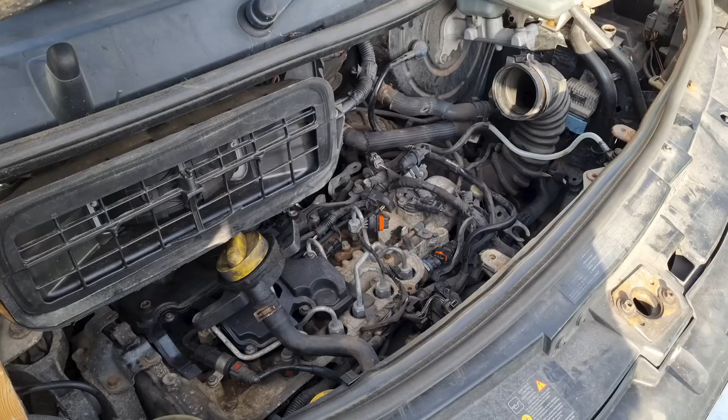Stop striking. Right, it's still Saturday. We've just done the update video and then I've been cocking about with the van, and I hate working on vans, like with a passion, I hate working on vans. It's really annoying and unnecessary, you've got to move everything to get to the thing that you want.

My fabrication table at the minute is just covered in stuff that has to all go back on once the sensor gets here on Monday. Which it better get here on Monday, that's all I'm saying.

Scissors, where's my scissors? So what I'm doing now, I'm not sure what time Sam's coming to get me, it's currently about 10 to 2. But I want to get a start on this Dynojet kit. This is the next job that's happening with ASBO, and there's loads of people that's been interested in this.

What I've got is a set of pod filters that I want to run on the bike. Paul recommended these Pipercross pod filters, he uses them on an awful lot of his bikes and stuff, and they are quite cool. They're going to look really, really good on the bike once it's all done and dusted. Quite a simple looking thing, but they're nicely made, there's no glue oozing out of them all over the place, so I think they're going to be in there.

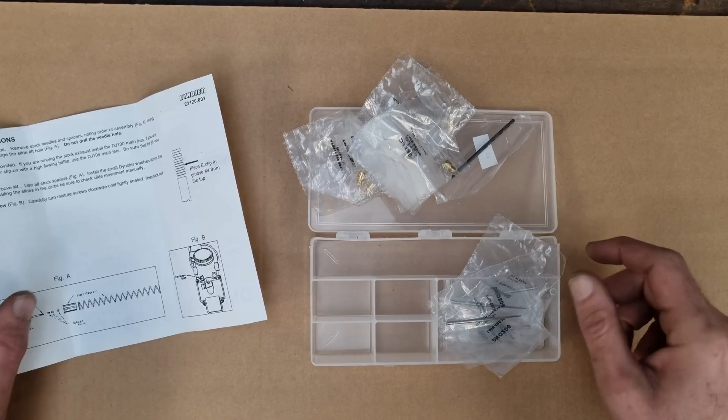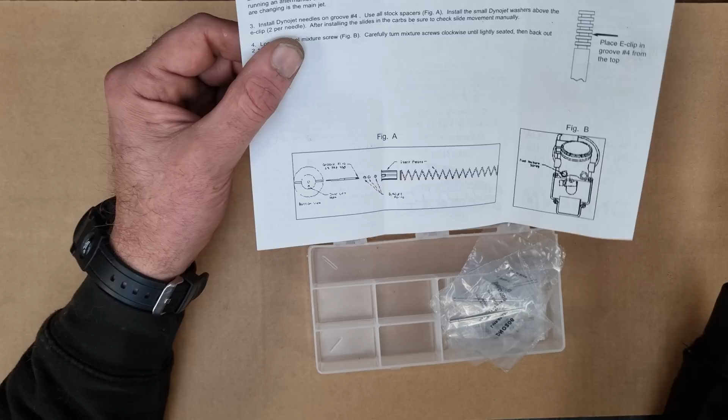I got it wrong, as per usual. They're not pilot jets and main jets, they're basically 2 different sizes of main jets. There's 100s and 104s. The 100s are if you're running a stock exhaust, and the 104s are if you're running an aftermarket exhaust with a higher flowing slip-on, baffled and all the rest of it, which is kind of what I'm thinking we've got.

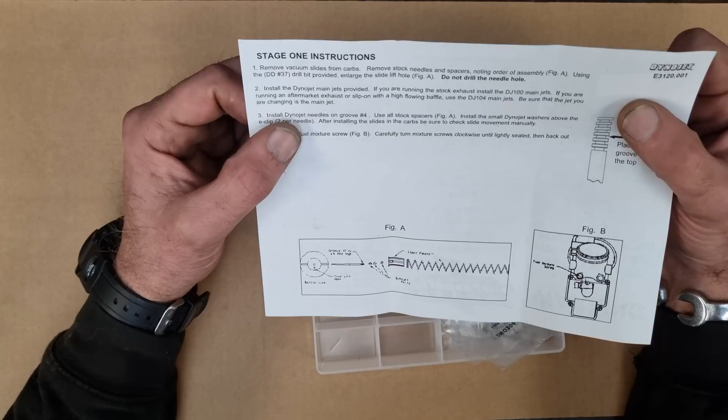To do it, it's actually really simple. There's only 4 steps to it. We'll go through it so you can see me doing it on the carb - that way if I get it wrong, you all get to have a joke. Basically we've got to take the vacuum slides out, remove all the needles and spacers and everything else, and then using this drill, open up the lift hole in each of the slides - the lift hole, not the hole the needle goes through.

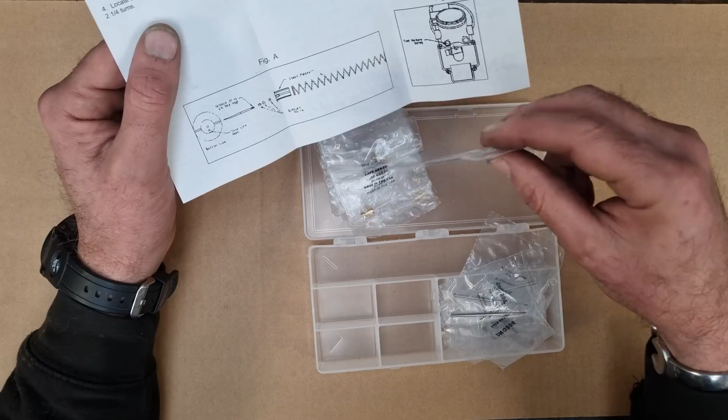Then we're going to stick the main jets in, and we'll go with the 104s because obviously I've got an aftermarket, a very aftermarket exhaust system. Then the needles - they're actually grooved, and you get these little clips, it's not a circlip, it's like, I don't know what you'd call them.

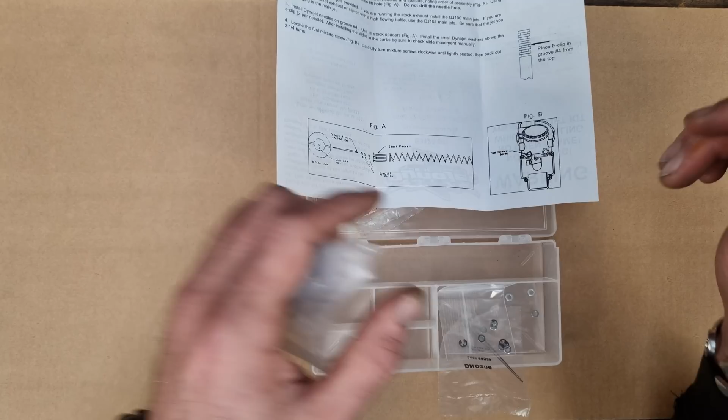What are they? It's not a circlip. What is it? I can't remember the name for them. But anyway, that goes into groove 4. And then we've just got to adjust the mixture screw. We'll get to all that in a second, but let's put those needles all in there.

How many is there? 1, 2, 3, 4. Ideal. Jets we can keep to one side as well, and we can start pulling this lot apart.

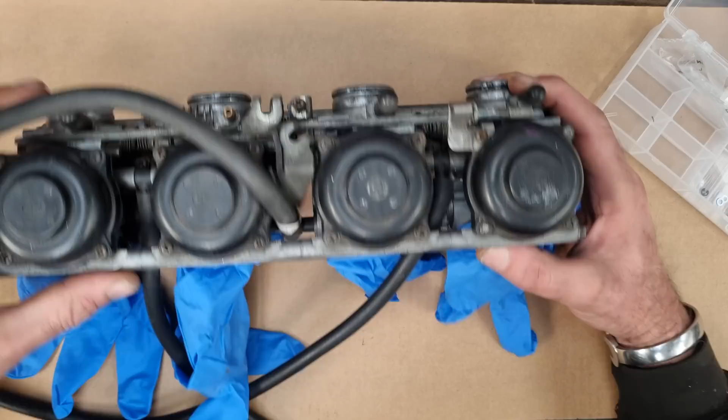So, vacuum slides first. What I'm probably going to do is set this up in the vise, just so it don't go anywhere, and we just do one at a time. First thing I want to do though is give it a bit of a wipe down.

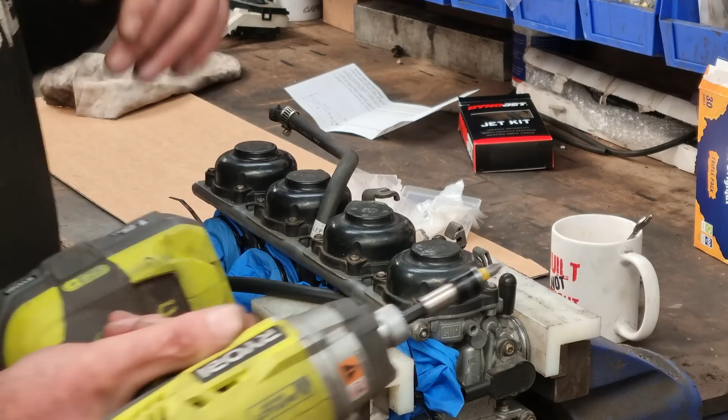I quite like these impact drivers. They are good, they just shock stuff out, but it's quite gentle rather than leaning on it. All these screws are buggered, I need to get them replaced - we'll be putting Allens in.

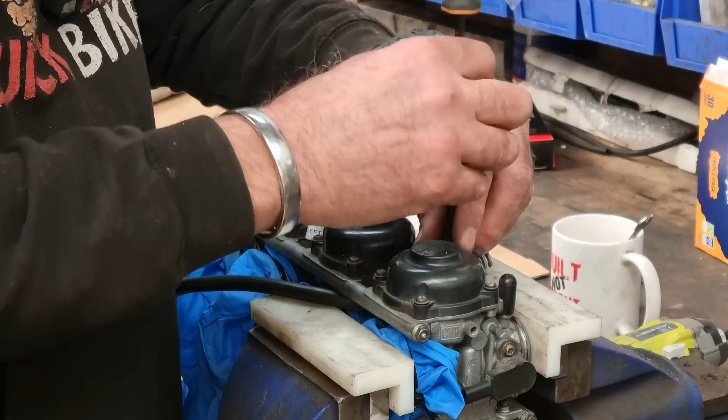This is the tube one. There we go. Right, where's my screwdriver? All I'm going to do is just do them one at a time, rather than go through doing all the slides first and blah de blah de blah.

Alright, so I suppose we could do - it just depends how much time I've got. I don't know what time Sam's coming to get me.

What I might do is do this one, top and bottom, just so you can see it, and then if she comes and gets me, I can just disappear. But I've got enough to finish the whole video. Well, no, actually I won't, because I still want to get them back on the bike with the filters. We'll go through and do all the slides first.

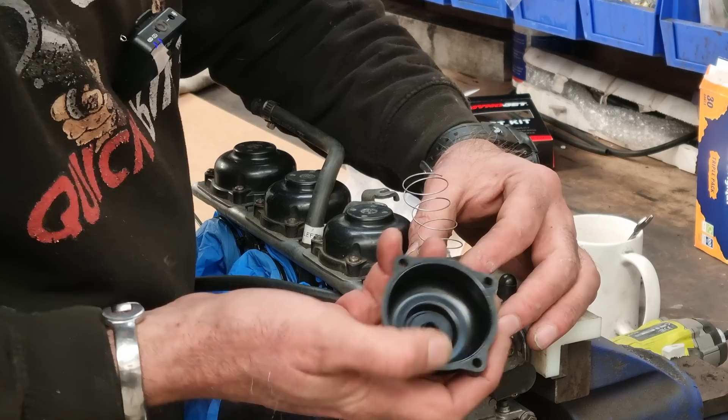Executive decision. Right, so 4 screws, it should lift up. There's a spring under there that locates in that groove, so it goes in like that. Stick that to one side, and this is the slide - it just pulls straight out. There's the needle, and this is just a little retaining clip, so if you squeeze it, it does come out.

Actually, should we do that under it? No, we'll do it over here. I want to have a look at the difference in the needle as well anyway. It's all still nice and clean - then again, it's done bugger all, isn't it? It's just the outside that I want to clean up, but it's going to get vapour blasted.

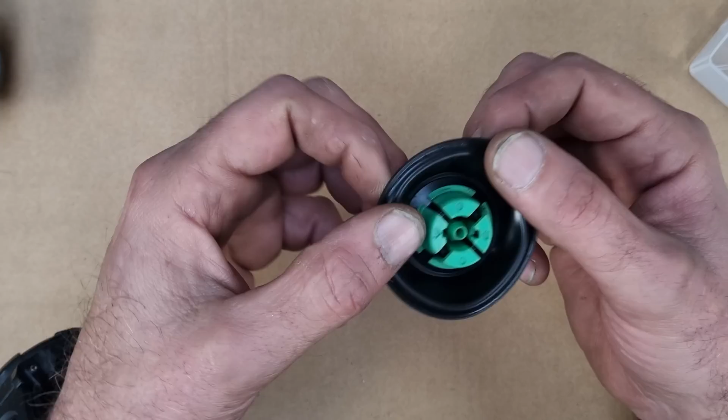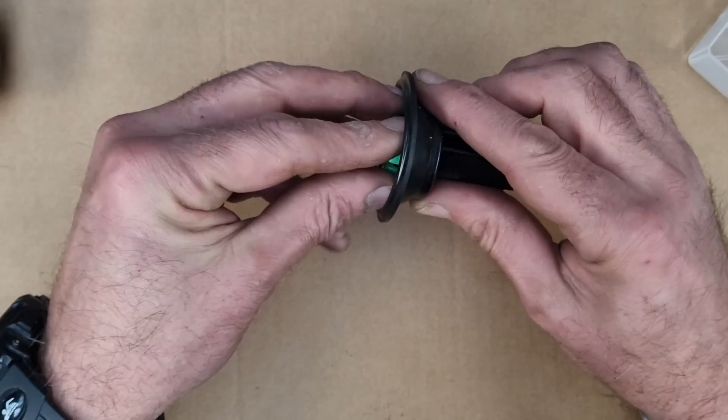Right, well these diaphragms should be fine. The bike was running quite happily before, it's just been sat there with a sealed up engine, so no biggie. So anyway, squeeze that clip, it should pop out like that.

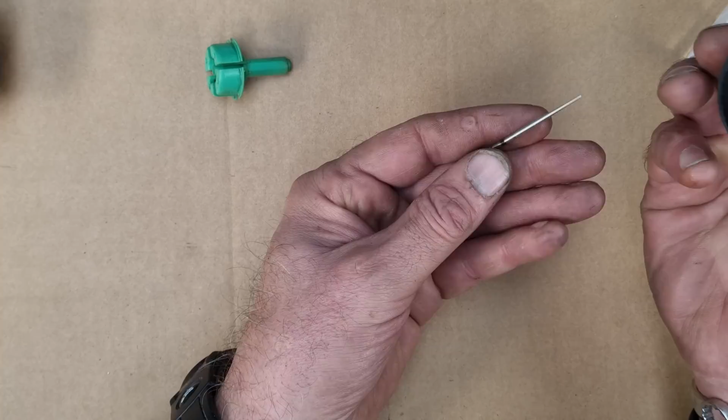And then upend it, the needle comes out. I think I put a washer underneath these - yes I did, and the washer has stayed in there. Right, he needs to come out, but that is basically the needle, and these are the stock ones.

So they're not adjustable like the Dynojet ones are. There's an end to it. If you want to raise it up, then basically you're sticking washers underneath it.

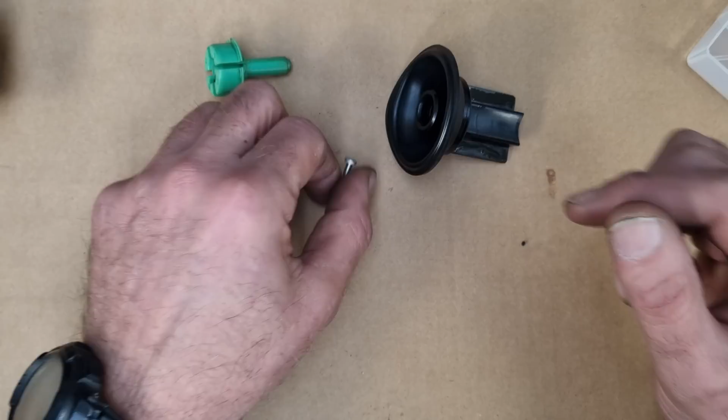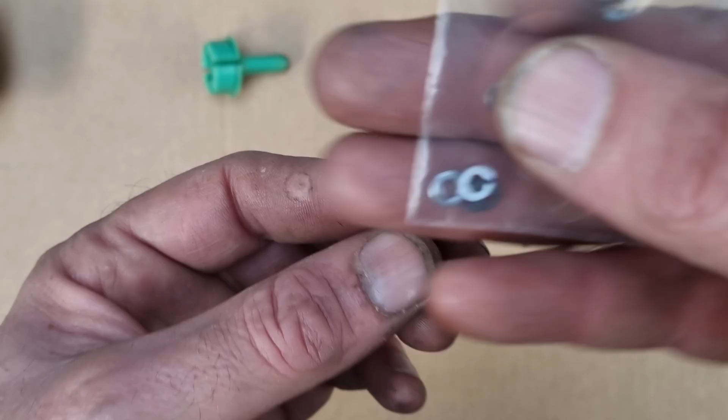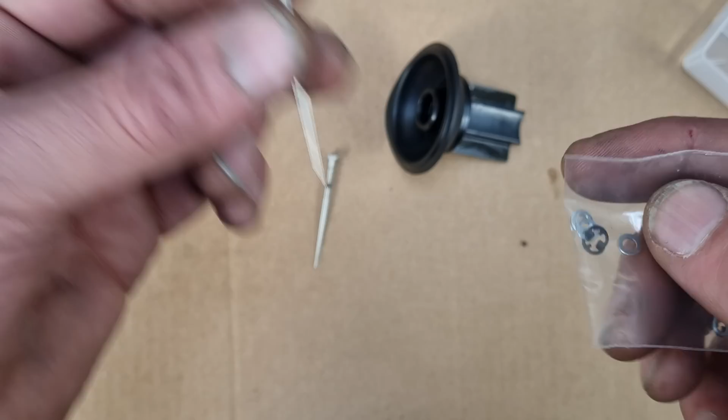If we look at one of the needles here, I don't know if you can see, there's a series of grooves in it at the top, and in the kit you get these little clips, like that one there where my thumb is. So that clip goes into the 4th groove, I think it said, and that basically sets the height of the needle within the carb. So they are slightly different as well in the profile apparently.

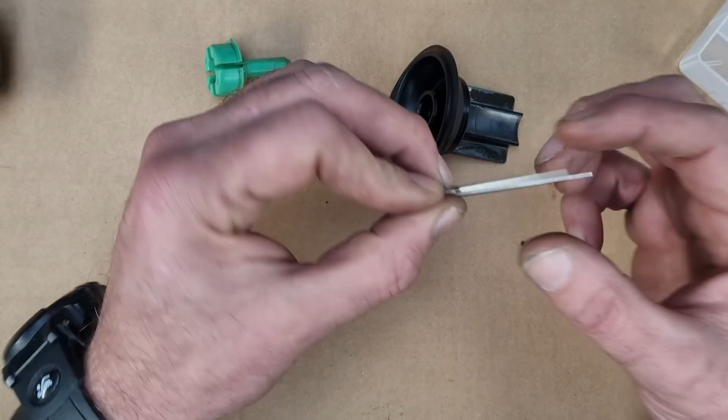So this one is a lot thinner than that one. There's a definite step up there, whereas on this one there isn't so much as a step. It's sort of the taper is longer, whereas this one, it's quite skinny, the stock one, and then it steps out a lot more as it gets up halfway, I suppose.

Right, so we've got all the slides out, all the needles are out, so that's all good. I just cleaned off this micrometer. We'll zero it.

So I have no idea what size this drill bit is. There's nothing on it. On the packet it just says DD37, which could be a number drill, I suppose. But I'm just curious - I have got a set of numbered drills, and I've got the little guide and stuff that tells me what size it all is.

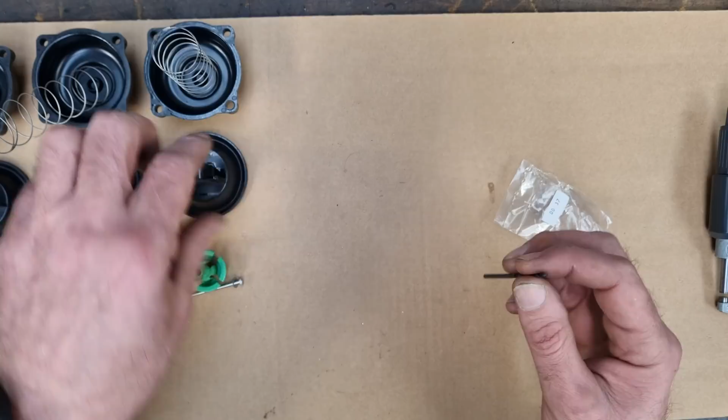2.64, oh okay, all right. I'm hoping it's a little bit bigger than the lift hole, which it is, and you're taking bugger all off of it, you really are. So anyway,

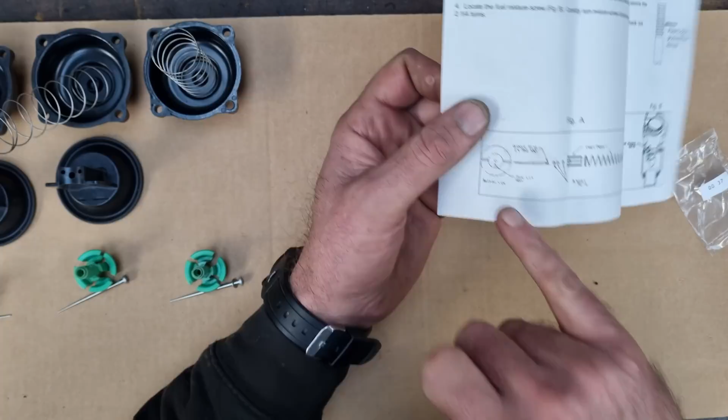2.64, we'll stick him back in his box, and then we're going to drill the slides up. So this is, it shows on this diagram there's only one lift hole. This is just the generic set of instructions, I'm guessing, for any carb. But here we've actually got 2.

So the one in the centre is where obviously the needle comes through, then you've got a hole either side of it. They're the lift holes, and that's what I'm drilling using the drill bit that they provide. So, that's the next bit.

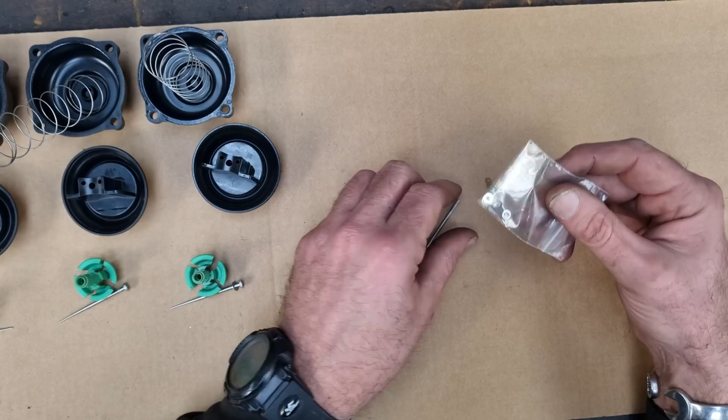So those little clips, he's putting the E-clip, that's what these are called. So the E-clip is going in slot number 4.

And these are tiny, so I just know it's going to ping off into the corner of the flaming workshop. I'm never going to see it again. Come on. 1, 2, 3, 4.

Right, a little pair of pliers, I think.

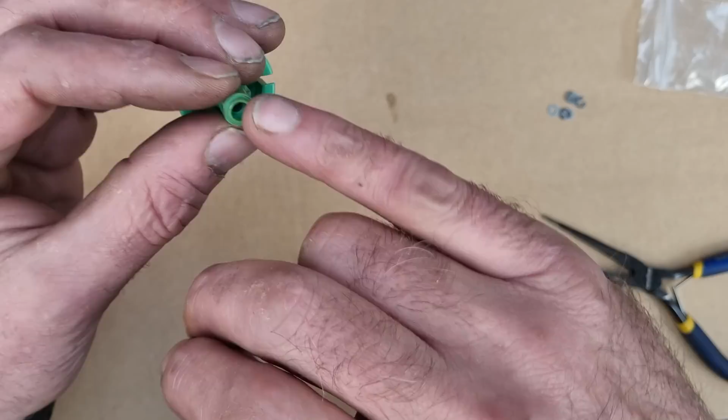Yeah, that's in 4. And there's a washer that goes on the bottom. So that's where it sits inside, can you see? In the bottom there, there's a little recess where it all sits. So he's going to sit in there, and then where the retainer comes down on top, there's like this little lip to it as well. So we stick a washer on top of it, so it's just got something to sit down onto.

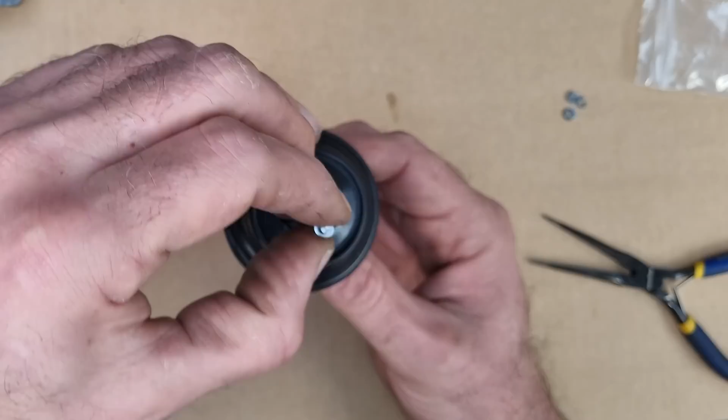And then that whole lot can basically go back inside the slide, making sure it goes in the right hole, and no washers fall off.

So he's in there, and then the retainer goes in. Come on. There we go, and that just clips down in place. So that's the first one done.

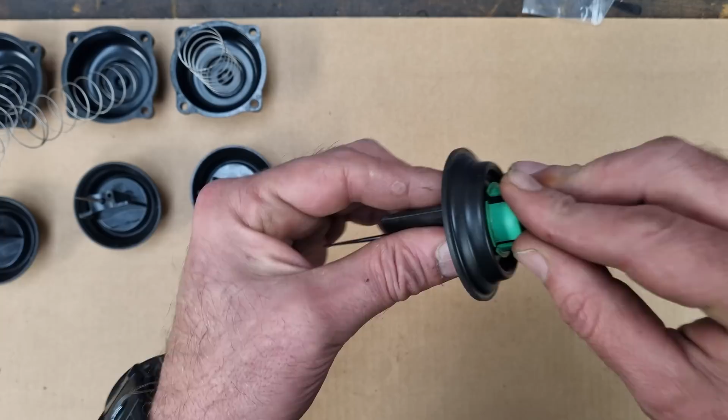There we go, right, that's the last one. As I've been going around, I've just been checking all the diaphragms, making sure there's no splits or nicks or anything else in them, because obviously if there are, they're all going to need to be replaced as well.

I think they actually come as part of the slide assembly, but they're all good, so we can go and shove them back in. And that's the next bit.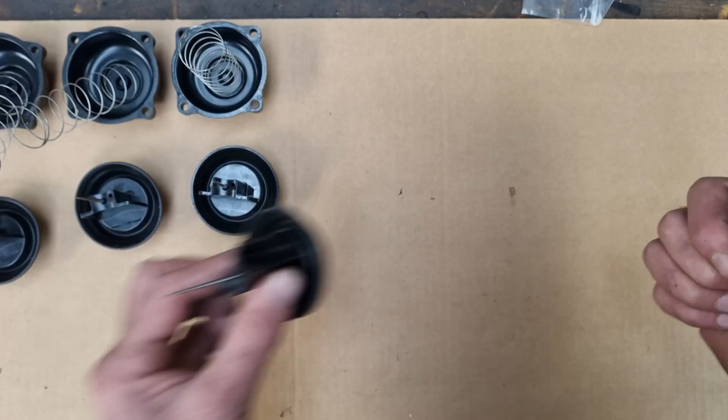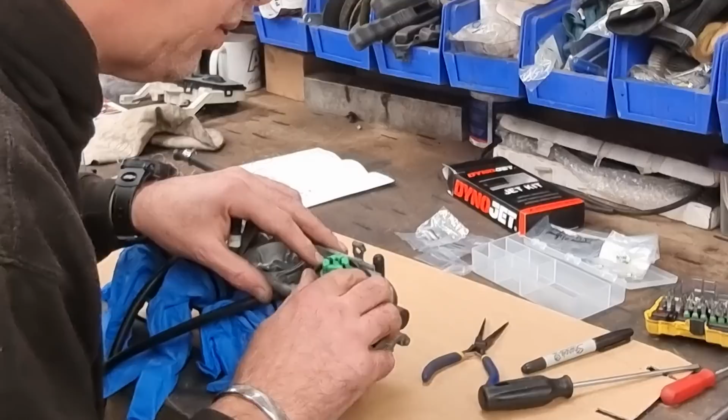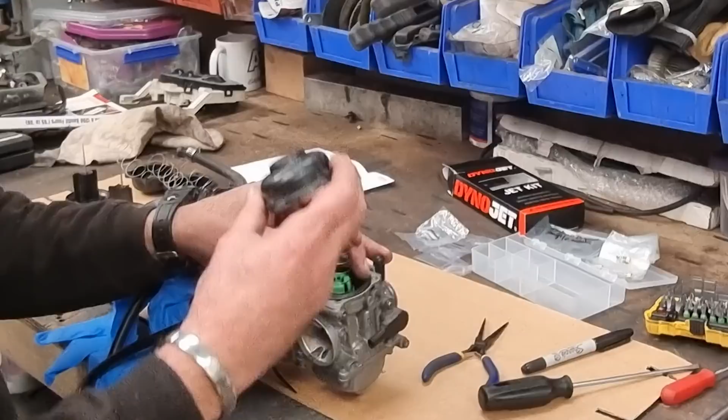Okay, right, so he's in. To make sure the diaphragm's down, and the spring, and the cover - might as well have the words all facing the same way. And he's down.

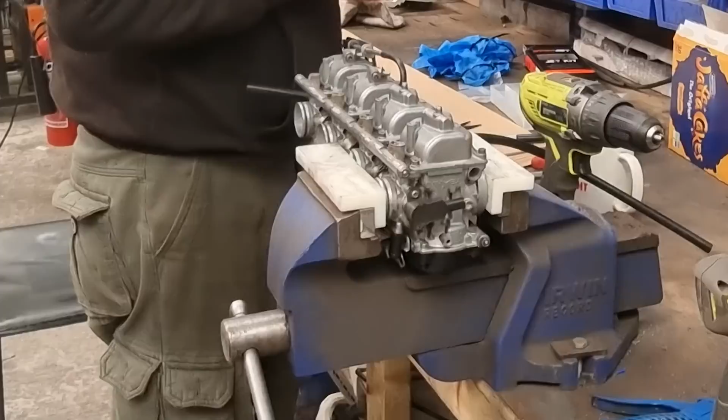Right, so that's stage 1 done. That was easy enough. Step 2, install the Dynojet main jets provided. If you're running a stock exhaust, install the DJ100. And if you're running the aftermarket exhaust or slip-on with a high flow baffling, use the bigger ones. Be sure that the jet you are changing is the main jet.

Right, okay. Alan, which one are you? You give me that one? No.

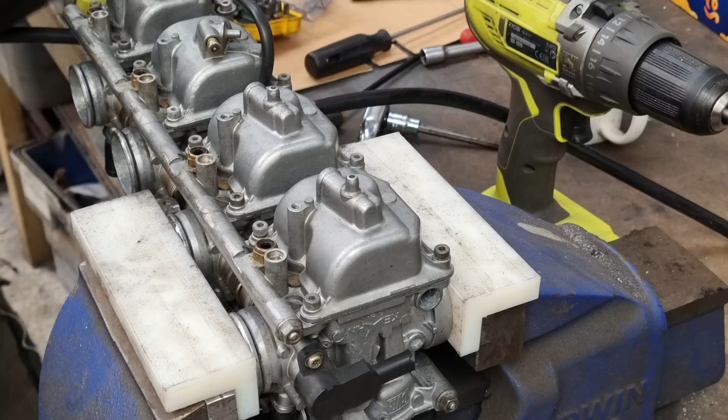Right, I've already done the first one. The camera wasn't on.

So all we've got to do now is have the float bowls off. I'm just going through them one by one and getting them done that way. But the float bowls have got to come off, and then I just want to check and make sure everything's nice and clean.

This had new gaskets in when the carbs were rebuilt, so I am just going to be reusing them. I'm not putting a service kit or anything else into it. They should be fine, but I just want to make sure everything's clean and tidy in there on each of the carbs. The float heights were all set, so there's no need to go through checking and changing any of that stuff, because that was all fine.

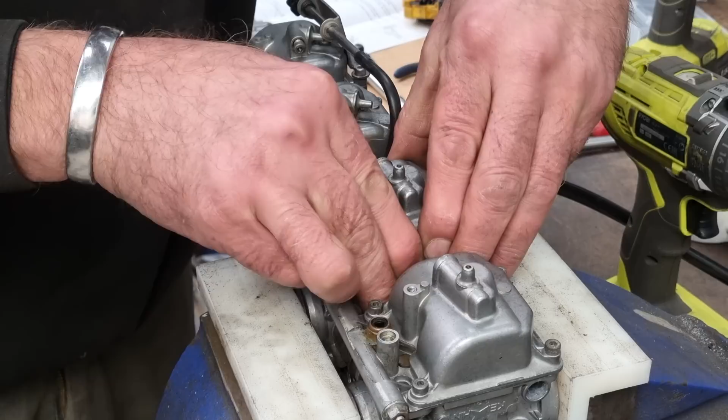It really is just a case of taking the main jet out and sticking another one in. Come on, off you come. There we go. That's all fine.

It's all good. Right, so this is the main jet. Where's my big screwdriver? So, just make sure it's clean.

Come on. There we go. So it winds up. I can't see what size it is, the writing on these is tiny. But anyway, we're going with the 124s, which is these ones.

Come on. And it just screws in the top there. Nip him up.

And then we can shove the top back on. I am putting a little bit of grease on the gasket, you know, the funny shaped O-ring. Just a little bit of something to help it. There we go.

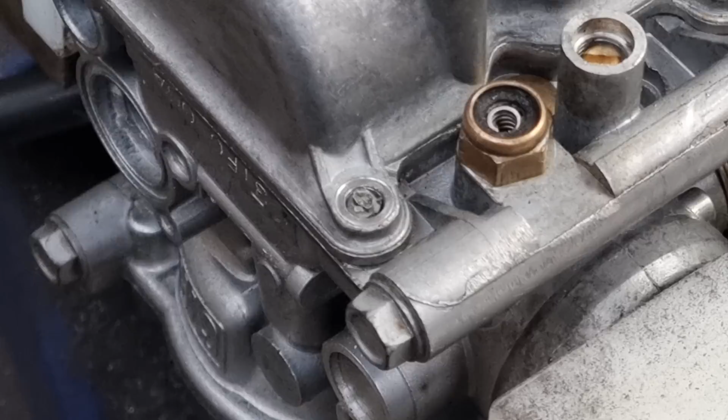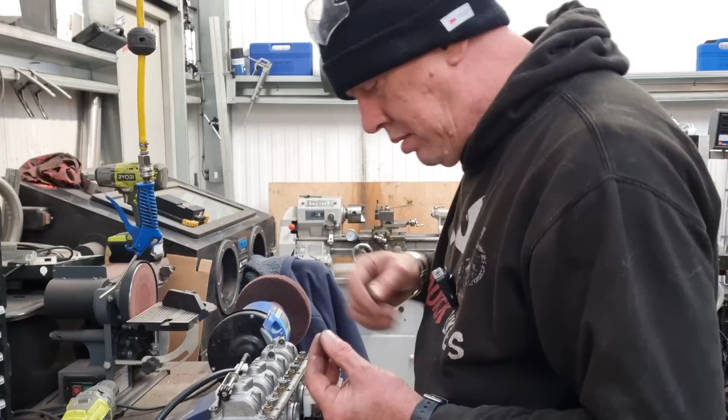No! The last one, I was just doing it up and the bloody end has come off of it, look. Oh, you're gonna be a complete cow to get out. Right, I can't believe it did that.

There's bugger all to it, it's literally, we can see the hole. Right, okay, final bit is just doing the air fuel mixture. What did it say, 2 1/4 turns? Right, so the air fuel mixture is that one, and that one.

And all we've got to do is wind it in so it bottoms out. Come on. Right, it's bottomed out, and then we're winding it out 2 1/4 turns. So half, 1, half, 2, 1/4. Do that on all of them.

Bottomed out, yeah. Half, 1, half, 2, 1/4. Where was it? There. Half, 1, half, 2, 1/4. And then the last one. Half, 1, half, 2, 1/4. So that's it, we should be good.